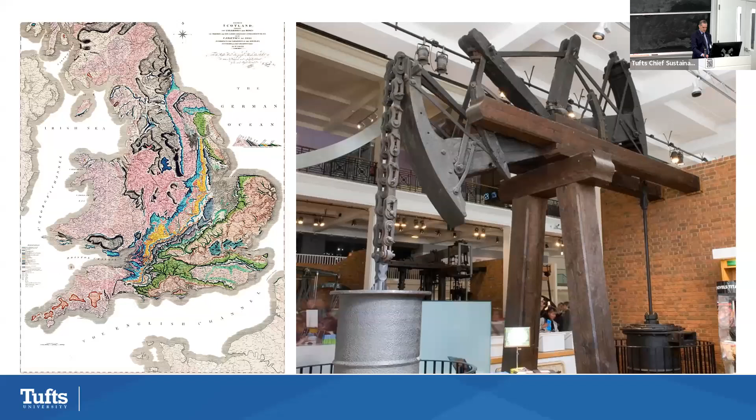And a lot of that food insecurity had to do with change in weather patterns. And the change in weather patterns in this community meant that the traditional knowledge, thousands of years worth of knowledge, was becoming less useful because the weather patterns were changing in ways so that when to plant and when to harvest was becoming chaotic. And so that's, you know, what we're thinking about as well.

We've got this industrial revolution. It improved the quality of life for people around the world, but it did so in a really uneven way. And the people who now today are the poorest are really suffering the consequences of that. So we really need to think about, right, the transition here is about how do we get away from fossil fuels? How do we think about that in ways that at a global scale, we are evening out and creating a more uniform set of benefits. So these are the things that are in the background.

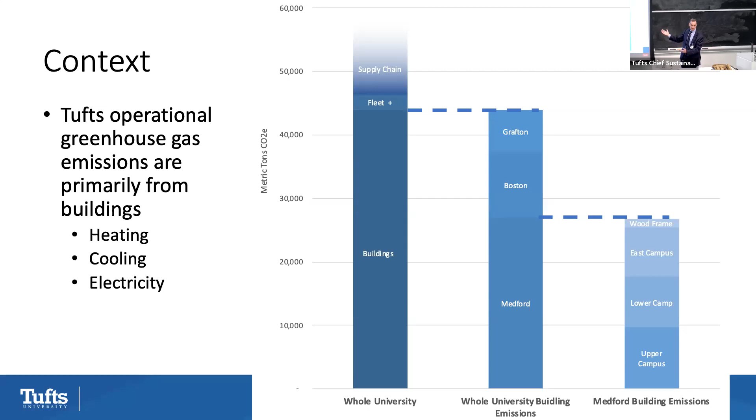It's our single largest source of emissions, and it's a critical challenge everywhere. So we're going to do the quick overview of, okay, so you got some buildings, where's that emissions coming from? There's really two things, and there's really only two big things. It's heat and electricity, right?

So heat, here's what's incredible, right? In all cold climates, we're still doing the same thing that we've been doing for thousands of years, which is we just light a fire. The fire happens to be in a box somewhere else. It's in a basement, it's in a boiler plant, but it's just an open flame in a box. Setting stuff on fire is a really good way to make things warm. Setting fossil fuels on fire is awesome because they're full of energy, right? They have really bad side effects, but they're really energy rich.

So heat is one of our key sources of CO2 emissions. The other one is electricity. Now, the majority of electricity around the world is kind of made the same way. I've got an open flame, I'm burning fossil fuels, I'm boiling water, I'm making steam. The steam is pushing on a set of turbine blades. It's making something go around and around, and I'm rotating magnets and copper against each other. I'm getting a current, right?

What's important here is I've got rotational force. That rotational force is coming from the ignition of fossil fuels. So my carbon emissions are from that open flame. Everybody with me so far? Okay.

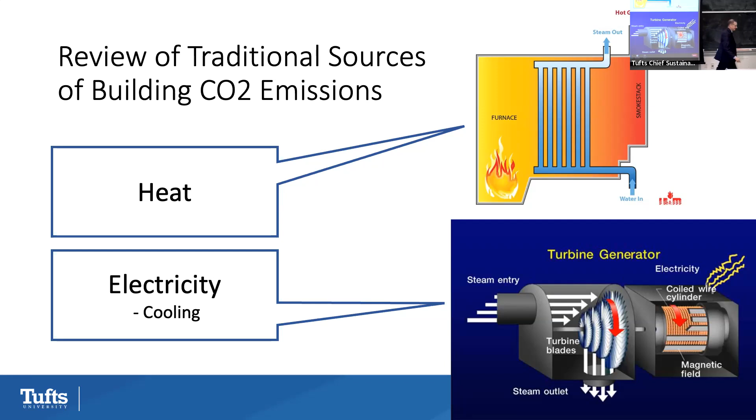So electricity, I can imagine a way that we can deal with electricity, right? It's not easy, it's not simple. This is a vast oversimplification. If you saw the panel around wind energy, you got the complexity, right? But we can imagine a world in which we're like, okay, I could get electricity from wind turbines and solar panels and maybe some other stuff.

I've got some nuclear in there, I've got some hydropower in there, but I've got these no CO2 tailpipe emission sources, right? So if I can just use electricity for everything, I can imagine a world where I've got a zero carbon electricity system, right? And I just want to mention, cooling is the other big thing we do on a campus, but cooling is generally run on electricity. So that's why it's in my electricity box. Okie doke.

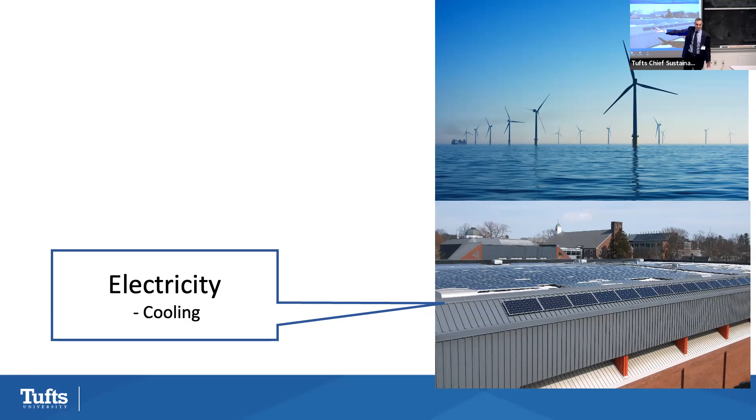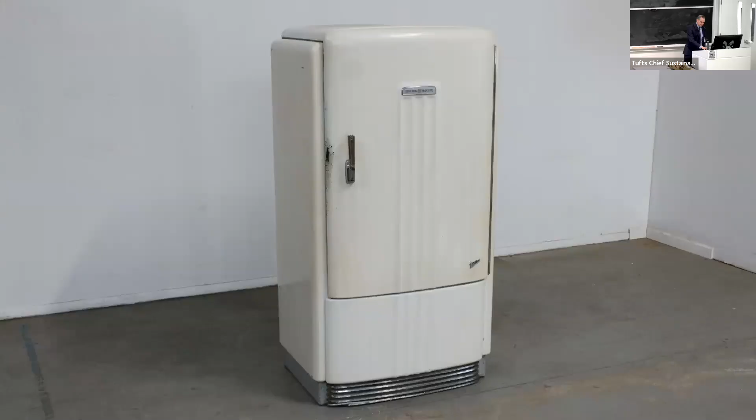Right. So the real problem is heat, lighting stuff on fire. And currently the way we do heat is like choo-choo train technology. We're just lighting stuff on fire in a box. And we're using all this heat energy and we're trying to contain it, and we're trying to make it provide energy services to us. Instead, we should be thinking, instead of the train, we should be thinking of the refrigerator.

What's the refrigerator do? How does the refrigerator work? It's a heat pump. Thanks, Chris. It's a heat pump, right? Does a refrigerator make heat? Yes. Where's the heat, Tina? It comes out the back. There is heat coming out of the back. Do you know where that heat's coming from? The inside. Yeah, it's coming from the inside. So is it making heat or is it just moving heat? It's moving heat.

Let's just say it's a device and it has a working fluid inside, and at one side it's hot and one side it's cold, and that hot and cold is happening through change in pressure. When I pressurize something, it gets hotter. And when I let that pressure go, it gets cold, right? And by moving a fluid around in a circle through that system, just pumping it, I get hot and cold.

And if I put a really cold pipe into a refrigerator, the slightly warmer air inside the refrigerator is going to warm up the pipe, right? And that heat is going to travel around and go outside.

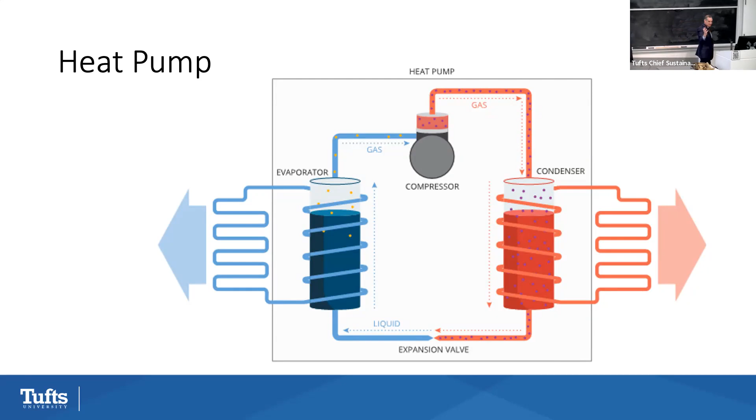So you could actually heat a room with a window air conditioner if you turned it around. It's not a real good way to go. It's super inefficient, but you could do it. Again, not well, you might freeze.

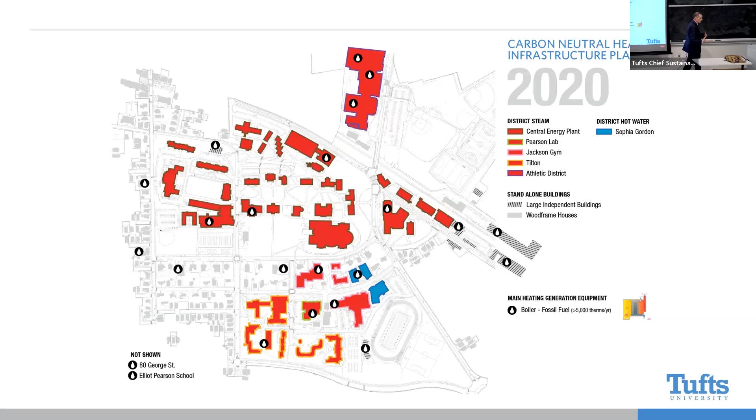Okay, here at Tufts, we are in a district environment, right? We have lots of buildings, and this is how most campuses work, college campuses, hospitals, retirement communities. There's lots of places that work in a district, most of Denmark. There's lots of places that work in a sort of a district context where you say, we're going to manage the heating and cooling of buildings across our whole portfolio, not just building by building.

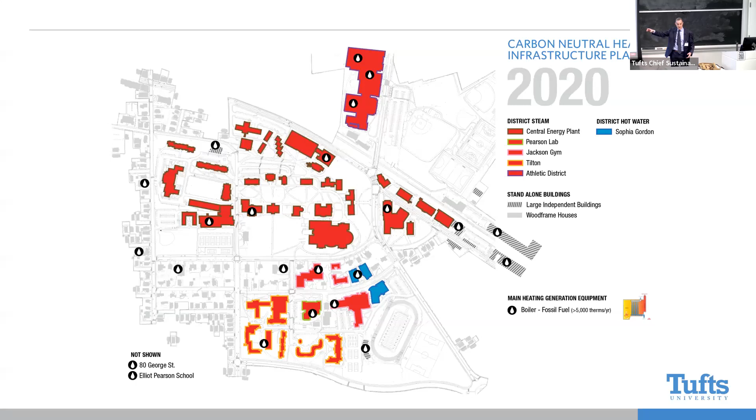Because most people, if you live in an apartment building, there's a boiler and an air conditioner in the basement or on the roof. You live in a house, same thing. Here, we're handling it across the whole thing. So let's talk a little bit about how that happens. So how does that happen here at Tufts?

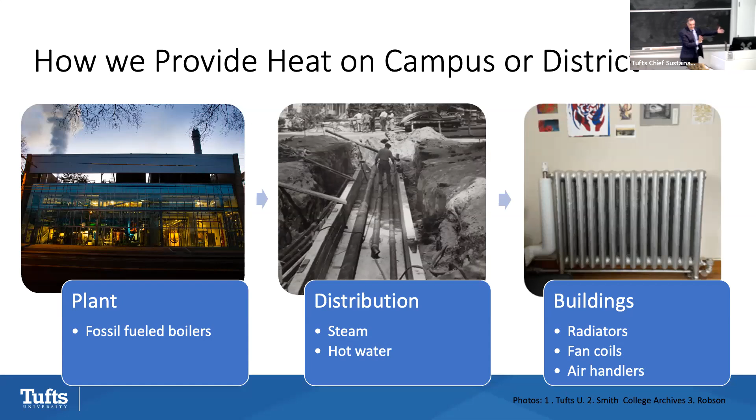In buildings like this one, it's a little bit more sophisticated. The steam comes into the building, it's usually heat exchanged for hot water, and it comes through a ventilation system, right? There's fans pushing over it, pushing it into the room. But it's all starting with a flame. There's a flame back in the power plant heating everything up. So that's how we kind of do it today. So far, so good? All right, excellent.

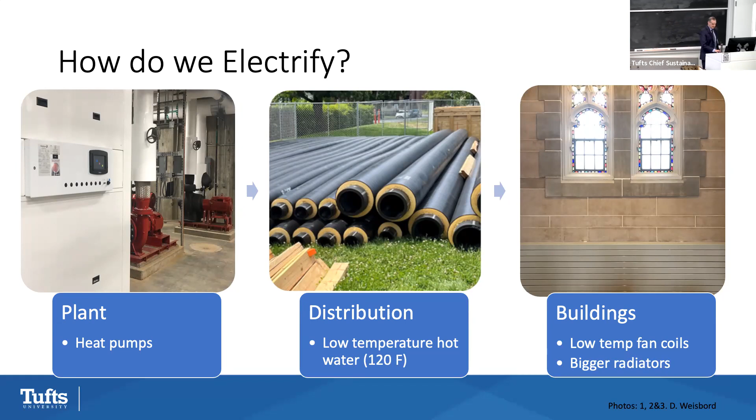So the traditional approach to mitigation in a campus setting was, we're going to do all of the energy efficiency stuff first, and then we're going to change the source. And I would say, I think that thinking is dead because it's too slow. Right. So we actually are going to change the source, and then we're going to catch up with the renovations over time. And that takes a different kind of thinking and discipline than most campuses are ready for. At Smith, where I was working previously, it took us a while to get our heads around that. Because everybody wants to renovate everything perfectly, because pride of place and stuff.

Oh, I'm sorry, Emma, you had a question. Yeah, it was just whether or not Tufts has looked at what the actual geo well would look like and how deep the wells would be, and if it would be more of a spread out shallow one or super deep. Yeah, so there's different ways. Let's come back to this, but will you remind me? Because this is actually a fun question too.

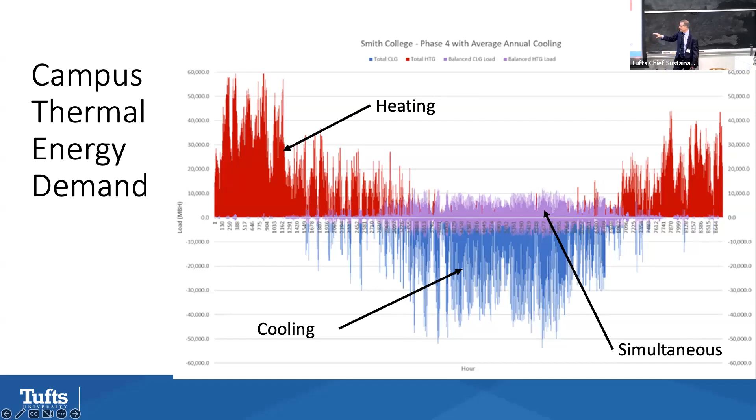So this is really interesting. In January, February, super cold, I've got a lot of heating demand. Here's where it gets hot. But all through this middle, I've got moments when I've got hot and cold at the same time. Well, when you have a heat pump, you can just move that thermal energy from the hot pipe to the cold pipe. So if you have a dining hall that's full of people and it needs cooling, but you've got a dormitory that everybody's left and it's cold, you can take the heat out of the dining hall and essentially put it into the dormitory. It's not quite that straightforward, but in concept, that's what's happening in a district. So the more diverse your district is, and campuses are great for this, the greater the efficiency potential you have. Okay, so that's what a campus energy load looks like.

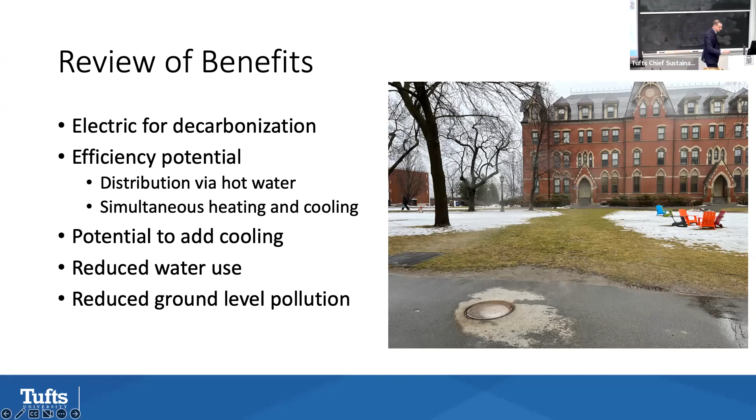And basically, the heat pump sits next to the sewage line. It's a really big sewage line. And they extract heat from that sewage. It doesn't go into the buildings. Everybody stay calm. But it's a great source of heat in this environment.

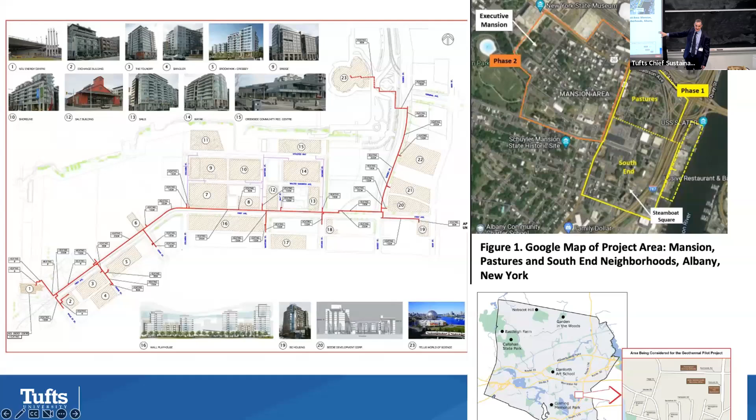And because they're mostly laboratory buildings or clinical buildings, they are highly ventilated. They're pushing a lot of air through these to keep the air clean because of what's happening in the building. Well, that uses a ton of energy, because I have to reheat, recool, rehumidify, dehumidify all that air that's going through those buildings. I don't have a lot of space for things like ground source heating and cooling. So these are complicated.

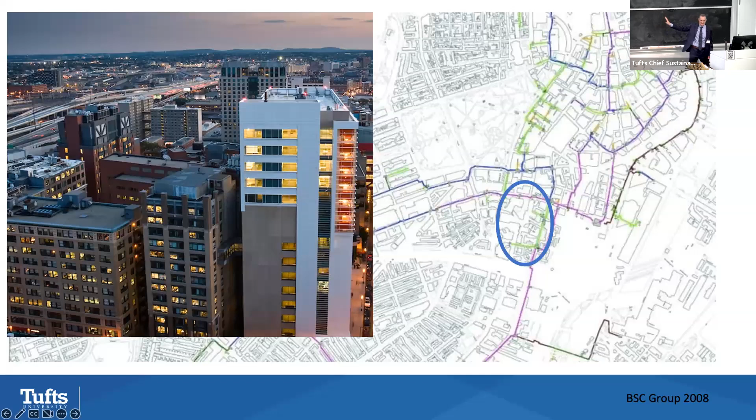They're making steam in Cambridge, piping it at high pressure across the river, all through this system. And there's a huge amount of waste in that system. And the steam's really expensive. And once the steam gives up its heat, the condensate doesn't go back to the plant. It just goes down the sanitary sewer. So it's incredibly water consumptive. So this is a big thorny thing that's on our radar.

All right, so planning status at Tufts, just so that everybody here knows, and then we'll come back to Emma's question. We made plans for the Grafton campus and for the Medford Somerville campus to decarbonize, to electrify. They involve lowering the temperature of water distribution, doing renovations to buildings, and really using air source as our medium for heating and cooling those buildings. That planning was done before the Inflation Reduction Act, and I cannot tell you how dynamic a world we are living in right now.

We have new federal legislation. We have a new Massachusetts Climate Act. We have new local law in the city of Boston, probably one coming in the city of Somerville, that are like carrots and sticks for doing all of this work.

So we're stopping and we're going to replan what's happening here in Medford and Somerville and in Grafton, because the Inflation Reduction Act gives a lot of money for ground source heating and cooling and no money for air source heating and cooling, which had been our plan. So we need to just go back and take another turn. And it's so many different systems that it's actually a replanning exercise.

So that's where we are right now in thinking about our own systems. That is active work underway. And we're going to complete a plan for the Boston campus. So that's all part of what's happening. We've got a team that's working on it, and we're talking to students and faculty about how to do that work.